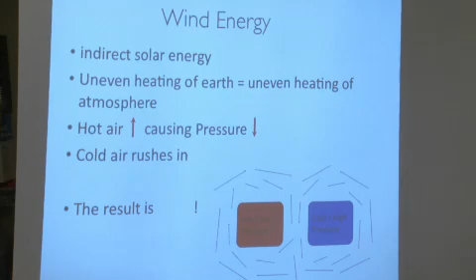So that's what's going on there. And then a lot of confusion sometimes happens. A lot of people see these turbines, or not turbines, but mills on farms, and it's confusing - what's this versus this? Is this just a junky version of this? The difference is, if it's a mill, it's extracting mechanical power, versus a turbine is extracting electrical power.

These mills are very high torque devices that move relatively slowly in terms of rotation, and are used to do things like pump water or grind grain. They've been around forever. They're still really common in the US and in many places for pumping water. If you drive across the country, you'll see these everywhere. They're still in use, and they're a whole lot cheaper to build than a turbine, because you're going from mechanical work to mechanical work.

So that's very direct and much, much cheaper than doing the extra steps to get from mechanical work to electric power generation. A wind turbine, in contrast, is electrical power. They have been around a long time too, but not for most of humanity. And again, they're going to be moving very quickly at much lower torque.

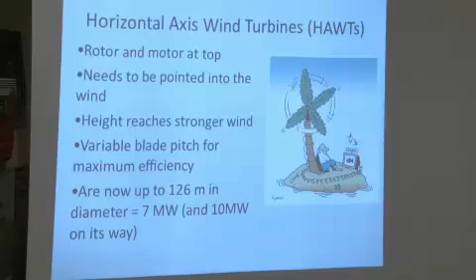So wind turbines I'm going to focus on, but I will go back to windmills a little bit at the end. You have two types, right - the horizontal and the vertical axis. The horizontal axis is what you're used to seeing around here, and what's in the news a lot, because they can go to much higher heights, and wind is much better the higher you go. The horizontal wind axis turbines are the more common thing, at least in my knowledge, before I started doing any research into them.

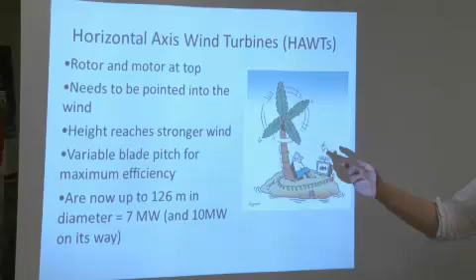So the rotor and the motor are at the top. It has to point into the wind. The higher you go, the better, but you can imagine the higher you go adds costs and difficulty. You often try to change your blade pitch to maximize efficiency, because depending on how fast the wind is, you want a different blade pitch. And they're now really insanely huge.

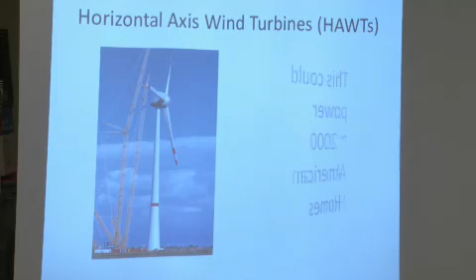So this is an insanely huge 7 megawatt turbine, which I think you can sort of see - is there a truck down there or anything? It's hard to get scale when it gets this big, but it's ridiculous.

Some of the challenges you can imagine in building this thing is just getting all the materials to the site, because you're probably not going to build your manufacturing plant, or your blade, right on the site where you're going to want to install your turbine. So then you have to get your blade there, and you're actually limited by the size of a train railroad car or a large truck or whatever. So there's all these crazy limits when you're getting up to be this enormous.

So it's kind of remarkable and challenging. And this is of a scale that we're not going to be touching, of course, but it's nice to sort of see the extreme of what is out there.

So this is a 7 megawatt turbine that's actually running now, I believe. And they're currently building a 10 megawatt that'll be in production, or running, in a year or two, which is a pretty big jump, 7 to 10. So yeah, it's definitely an area that's taking off.

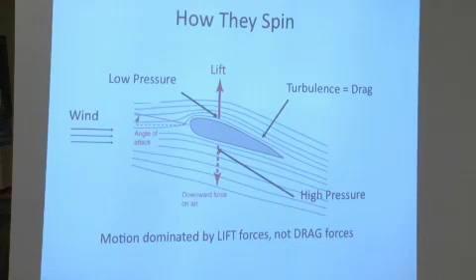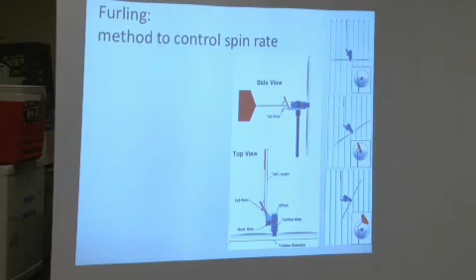One thing to think about is the need to control the spin rate. So you can imagine on days where there's not much wind, you might want to change the pitch of the blade to make sure you're maximizing the wind you're capturing. But on hurricane days, you have to make sure that your wind turbine doesn't completely just spin out of control. And so this is a really nice, relatively simple way to do it.

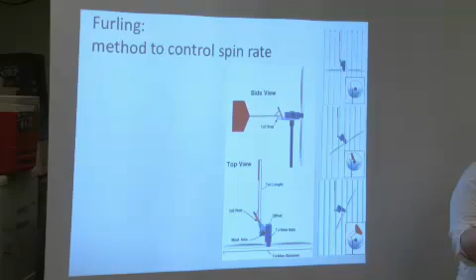So you can do it mechanically, electrically, or manually. Like old wind turbines from windmills from 100 or 200 years ago, there was some poor guy whose job it was to turn the turbine into the mill into the wind, or not, depending on how fast it was. Thankfully, there's been ways to optimize that either mechanically or electrically.

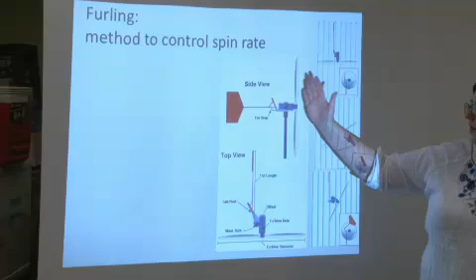So this is a method where basically the weight of the tail and the turbine allows the tail to stay connected to the turbine. The turbine generally has a tail that's exactly perpendicular - this plane and the plane of the tail are perpendicular, right?

So the tail makes sure it's always pointing into the wind, which is what you want, except when you're going too fast. Now you need the tail and the front of the turbine to not be perpendicular. If you're in gales, you need it to be completely rotated, so that the wind is just passing by the turbine. Or if you're in a moderate wind where it's too fast for the turbine but still usable, you want it to be off a little bit.

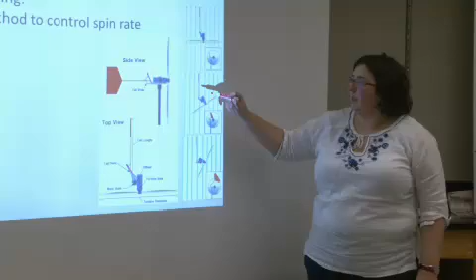The way this works is that when the wind speed gets high enough, you get some lift in either the tail or the turbine - I forget how it operates exactly - and that allows this tail stop to be disengaged. So then the turbine rotates a little bit, which you can sort of see from this top view. These are the front views, and this is the top view. So the turbine rotates a little, the weight balances out, the stop engages again, and it maintains this angle of orientation. If the wind speed gets even higher, the weights get out of balance again, things lift, and the stop disengages. So it's a really cool system to keep your device safe, and there's a lot of them out there.

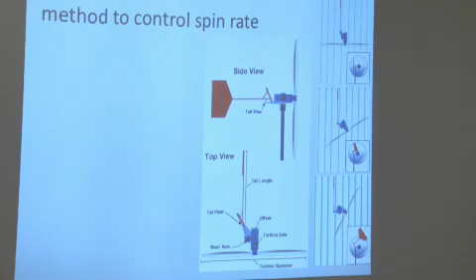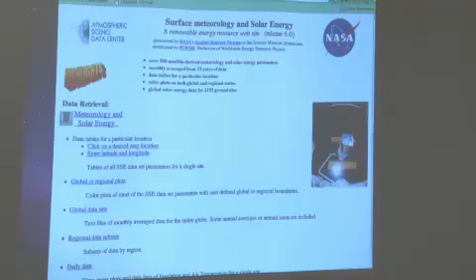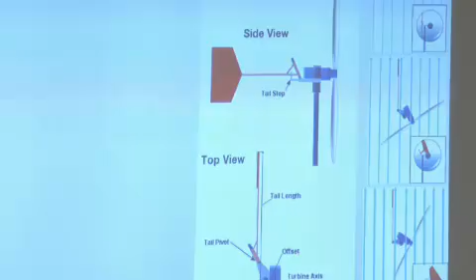So the typical components of a wind turbine: you have your rotor, you have your blades, you have a brake, because you want the turbine turning at a certain speed ideally, so you may need to provide braking before you're providing rotation out of the wind. That's another smaller step you can take. You have a gearbox to get the speed right to power your generator.

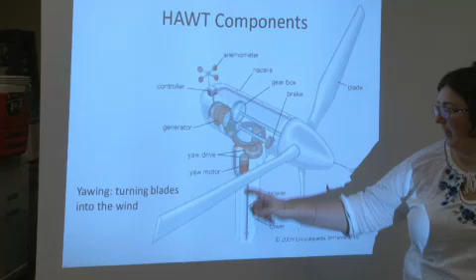Typically on a fancier wind turbine there's an anemometer that provides the electrical control with yaw drives and motors to rotate the turbine into or out of the wind to maximize its speed, and then your tower. All the electricity is generated in this part, and the power goes down the tower.

You can imagine the challenge of maintenance when you're dealing with something really high up. So the smaller turbines we'll be looking at are all on guy wires and a pivot so you can rotate them down and don't have to climb up to do maintenance, because that requires a much sturdier tower and is a much more dangerous job.

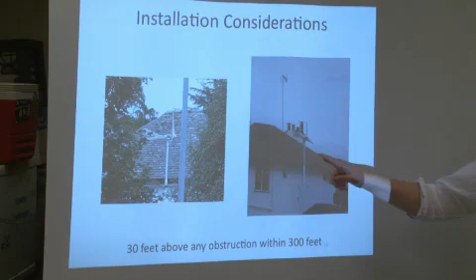Some installation considerations that one would think would be obvious but aren't always. This is a wind turbine installed basically on a rooftop by some trees, so it's got two types of objects blocking the wind entirely. This was a many-thousand-dollar installation that's probably providing zero electricity, because the wind may be sufficient 30 feet up, but right there is never going to be sufficient.

30 meters, 30 feet - a good rule of thumb is you want your turbine to be 30 feet above any obstruction within 300 feet. Obstructions include things like houses and plants and anything else that might be in the way.

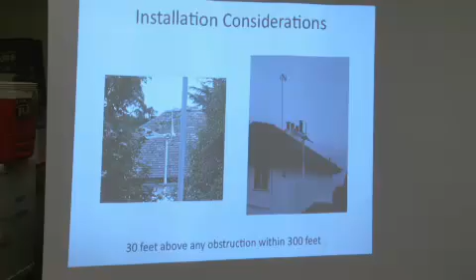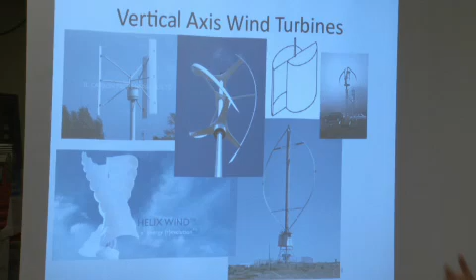And so these power traffic lights in Taiwan. There are places where these are installed effectively, and they're kind of cool, because as you can see here, you can almost build them out of anything, and you will build them out of anything on Friday.

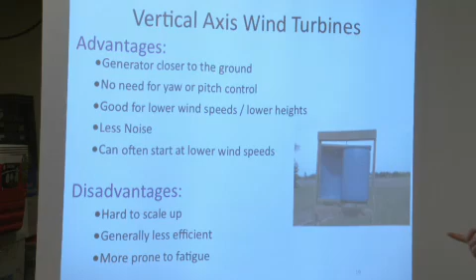Some of the disadvantages: they're hard to scale up, so you're never going to get a 7 megawatt vertical axis wind turbine. That's just not viable. They're generally less efficient and more prone to fatigue, wearing out more easily because they're capturing so much more of the wind. But for our purposes, they're definitely a possibility to look at.

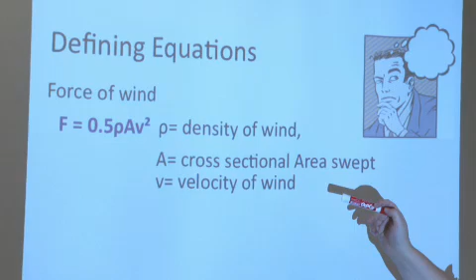Just a reminder of the equations we're thinking about. The force you're receiving is equivalent to 1/2 times rho times A times v squared, where v is the velocity of the wind, A is the cross-sectional area swept, and rho is the density of the wind.

The maximum possible power extraction is dominated by the velocity cubed. So your wind velocity is really what you worry about when designing. Area is important, but velocity is cubed, so the wind speed is huge.

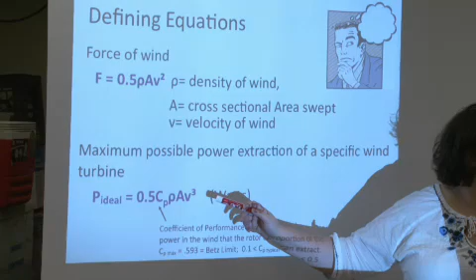Whenever you're thinking, is this a place where a wind turbine is appropriate, the first question is: what's the wind speed? And then there's a coefficient of performance.

This reflects the reality that wind turbines are not perfect. There's a hypothetical limit - if you Google the Betz limit you can find the proof, which is kind of cool - of almost 0.6 as your hypothetical maximum efficiency. A typical limit in reality ranges from 1/2 for a really sweet horizontal axis wind turbine to less than 1/10 for a vertical axis wind turbine, which is really old school but does the job when you need it.

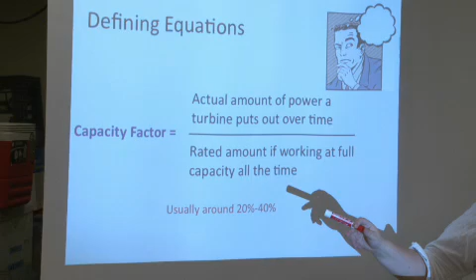The other equation to think about is the capacity factor. I've seen some websites say wind is so much better than solar because wind is 24/7. Well, not really - unless you're getting way up into the atmosphere, and even then there's a lot of variation. Wind is not 24/7; there's a tremendous amount of variation. Generally it's 20 to 40% of the time that your turbine is generating power, which is starting to sound more like solar, actually. That's definitely something to keep in mind.

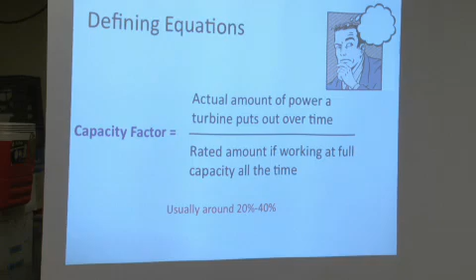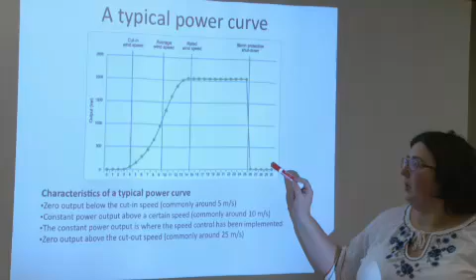Here's a typical power curve. At some given speed is when the turbine starts actually turning, because up until then it can't physically turn since the wind forces aren't high enough, and your power output is very low. Then you have an average wind speed somewhere around here, giving you about half the wind power you'd like. Then you have a maximum wind speed where you're happy, happy, happy, until at some point it gets so high you have to shut the turbine down or else you're in trouble. That's a good general way to think about what happens over different speeds - I'll show you data later with the different speeds.

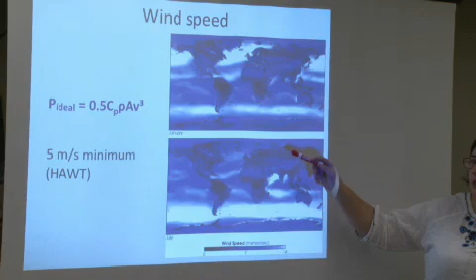You can see how much variation there is between January and July, so of course there's a lot of seasonal variation no matter what. This blue is 7 meters per second, which is getting to be useful. For a horizontal axis wind turbine you need 5 meters per second; for vertical you can go a little bit lower, but 5 is a good rule of thumb.

Again, why we're looking at velocity over everything else is because velocity is cubed in your power equation. So, great, I've told you wind speeds. I've showed you a NASA map of the entire Earth, but that doesn't tell you much for a given location.

So one way to get a really rough estimate of wind speed is this Beaufort scale, which was developed in the 1800s. It correlates what you can visually see and what kind of damage you're seeing to the speed. Some of the caveats are, number one, it's pretty rough. Especially if you're talking to people in a community and giving them examples, it's hard to remember exactly what the wind is like. Can you tell me what the Beaufort scale was today walking here?

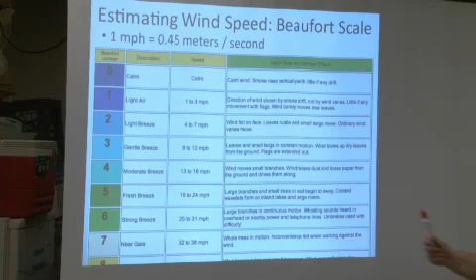I can't. I don't remember. I don't really pay attention to the wind that much. If you're working with farmers, they're probably a little bit more aware of it than you and I might be, but still, it's challenging. The other thing is that a lot of these metrics are on the ground, and we're probably talking about significantly higher than the ground, depending on what kind of turbine you're implementing.

And so, again, that only helps you so much. So if you're finding out that you're probably at 4 miles an hour, which is 2 meters per second and really low, but at the very ground level, and you're building a turbine that's 10 meters up, maybe 30 feet up, maybe you have a shot of getting enough wind.

Is there like a uniform scale from what the wind speed is at ground level to how it changes vertically, or is that a regional thing? Well, so it's both.

Yes, there are some scales that can help you estimate if you know what the ground is, what it is up above, but it's also really dependent on what's around. I'm about to show you a tool that helps a little bit with that, but it's still very imperfect. Ideally, you'd have an anemometer and leave it up for 5 years, with 10 different anemometers at 10 different heights, and that would get you actual real data you'd be psyched for. But that would be a really ridiculously slow, expensive project. So a lot of this is just estimations and doing your best guesses.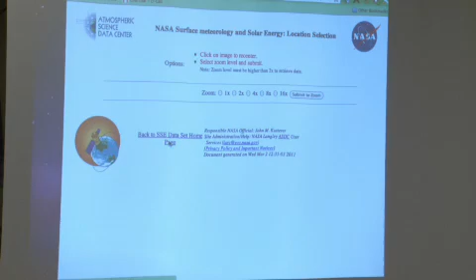And then it's slow, but it looks so clunky that I was afraid you'd be turned off by it, and it has good enough data that I wanted to go through showing you it. So you have this map of the Earth. You click in the part of the Earth that you care about to center it, then you click to zoom.

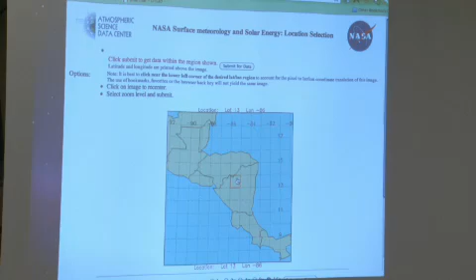We're in the wrong part of the world, but we're getting there. I'm gonna zoom in again. All right, and you can see this is data for a region, not for a small town. So there's all sorts of limits to this data, but it's useful.

And so now you can finally get your data, and now you can get crazy information. So parameters for solar cooking, for solar panels, cloud information, which can be really useful, temperature, which can be really useful, and now we're getting to wind. So you can see the variety.

So you can get 50 meter and 10 meter data, but because this is all satellite data or airport data, 50 meters is pretty high for anything we're talking about, and then 10 meters is for terrain similar to the airport, because they're measuring at the airport since that's the place where they have anemometers. So all of this data, again, you have to take with a grain of salt, but if you use it in conjunction with your own visual observations and talking to people, it's better than nothing, which is the alternative, or a $1 million 10-year study, which isn't viable either.

So we're going to just look at wind speed at 50 meters for that area of Nicaragua I just selected.

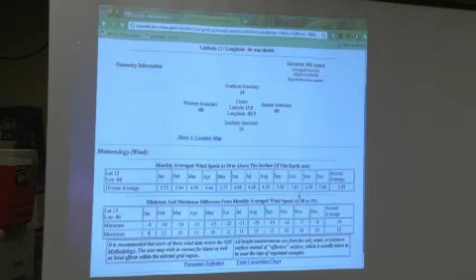You can see a 10-year average and a minimum and maximum variation, so it's pretty helpful just to get you into the ballpark of whether you have a shot of this working. Some of the other things you can select for are how high you are, getting to an estimate of where you are and what your ground cover is, and then it extrapolates what the wind will be. Is it 100% accurate given that it's doing broad-based readings? Of course not, but it's a start. It's a nice resource to know about.

Now I want to spend time talking about examples of wind power in developing countries. One is the Humdinger wind belt, totally different from what you're used to seeing, developed by a student who took one of the first D-Lab classes when it was the Haiti class. We have a wind belt here but I couldn't find it, so maybe during break I'll dig it up, or we can show it in lab on Friday. The way the wind belt works is that instead of rotation, it just uses the vibration of the belt.

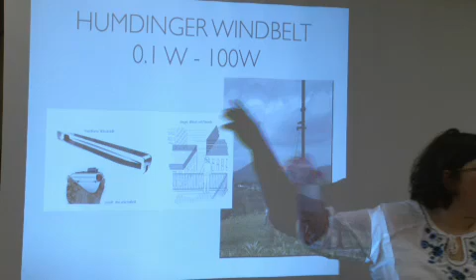Very similar to, I don't know if you guys can remember the name of the bridge that collapsed.

Does everyone know the Tacoma Narrows Bridge? Google it, you can see videos and it's awesome if you haven't. It's totally scary, especially because I have a friend who did some research into it. This bridge, a super long bridge, had natural frequencies at the same rate as the wind was often blowing, so the bridge would just go up and down crazily, and eventually one day it got so bad that it completely broke apart. The crazy thing is people used to hang out on the bridge on really windy days because it was so fun, like a roller coaster. So it's extra scary thinking about that.

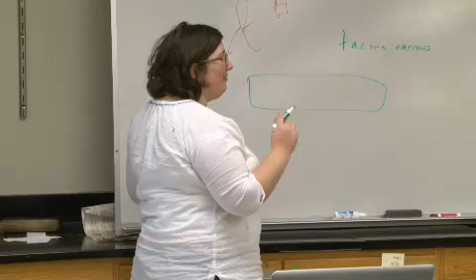But this was the inspiration for the Humdinger, which has a really tightly pulled belt in the middle of a support structure. The wind goes perpendicular to the board, which hits the natural frequencies of the belt and causes it to vibrate. Then you just have some magnets next to a coil on the corner that allow you to generate electricity.

For certain applications, this can be a really low-cost way to provide electricity. This is a relatively fancy way of building it, but you can imagine, and they have, building it out of something like a PVC pipe, which you can get anywhere, and building it really simply. Because there are very few moving parts and nothing rotating, it's much easier to build than even a vertical axis wind turbine.

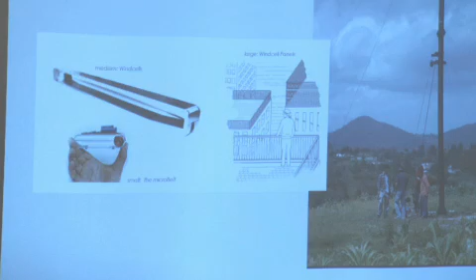It's a really neat application, and hypothetically you could imagine building it into structures like railings on buildings and stuff in order to power different things. So this is one example, and we do have at least a couple at D-Lab, so we'll make sure to show them to you later today or tomorrow.

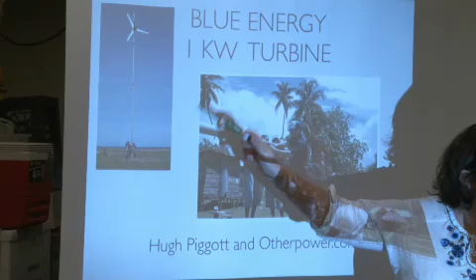Another example is the classic wind turbine in developing countries designed by Hugh Piggott. These are pictures of work being done at Blue Energy, in Bluefields, Nicaragua, which we worked with last year. They build all these turbines. You can see the support wires, and that you can rotate the turbine down so you can do maintenance on it, which is a really nice feature. That's one classic design that's pretty common in developing countries.

And then a lot of people have heard of William Kamkwamba. Oh, there's the wind belt, so let me go back to that.

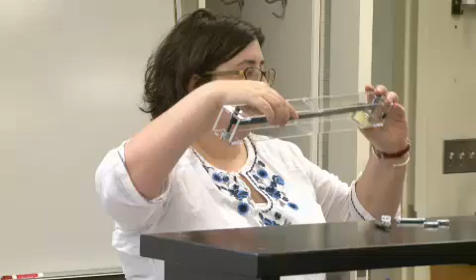So I'll pass this around, and the belt is not exactly taut at the moment, but you can see the belt, the magnet on the belt that goes against the coil, and that's really all there is to it. Then a little bit of circuitry in order to generate power, which is a really simple way to do things.

So what's the idea? The wind goes through the tape there, and the tape vibrates because it hits natural frequencies, and the vibration allows you to generate electricity. It's movement, that's all you need.

So William Kamkwamba was this guy. Where did he live? In Malawi. He just got really interested in how he could get electricity at his house, went to the library, read a bunch of books, got inspired, and built his own wind turbine, which doesn't look like your traditional wind turbine.

There are a few design improvements that could be made, especially with better resources, but it worked well enough for him to power a radio at his house and charge cell phones, which got people really excited, so then they would start paying him so he could start building more and more turbines.

So it's a really cool story, and now he's at Dartmouth in school, which he never could have done had he not built this turbine. So he's a cool guy.

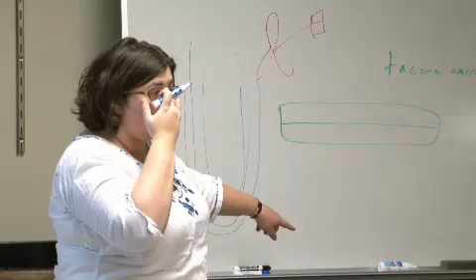So there's a rope pump here, and the way a rope pump works is incredibly simple. You just have a rope inside a tube that goes down into the water table, so that you're getting water through holes in the tube. Then you either have knots in the rope, or if you can find them, rubber washers, like every foot along the tube. This is obviously not to scale in any way. So the water gets trapped between the washers, and you pull up the water that way.

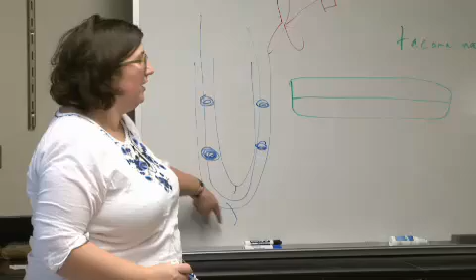So this is really simple. Again, we're talking about ridiculously low efficiencies, but if you need to irrigate, this is a way to do it that just uses the wind, that works really well. This was built for $40, which is ridiculously inexpensive compared to even like a Hugh Piggott wind turbine, which is in the thousands of dollars. So there are opportunities for a whole range of possibilities.

And then there's just so many different types out there. So if you look into it, wind is one of the areas where people get really excited and like to build their own stuff, and you can see a huge variety of designs in the world. So that's wind in a very fast nutshell. Are there any questions about that?

Okay, so next is microhydro. Microhydro is kind of funny because it's harder to find really good examples of installations in the developing world, because they tend to be just built but not well documented, is what I'm finding. So I'm going to talk more about how you would determine if a microhydro installation would be appropriate, and I don't have as many good examples of installations that are successful, but they're certainly out there.

So hydropower is just using the gravitational flow of water to generate power, considering both the two terms I'm going to use: head and flow rate. So head is the distance that the water falls, and flow rate is how quickly the water is moving.

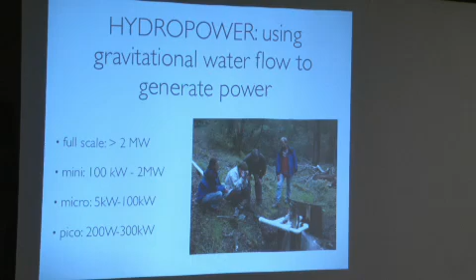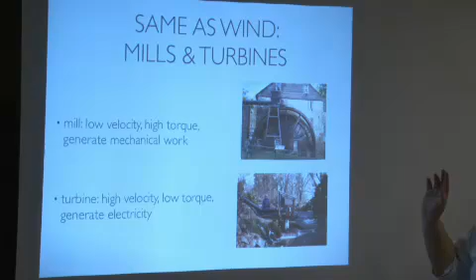With water power, it's the same as wind in terms of there being mills and turbines. You can think of the old grist mills and other things you can still see in parts of New England. They're low velocity, high torque, delivering mechanical power directly, as opposed to a turbine, which is much higher velocity, much lower torque, to allow you to generate electricity. So those are the two extremes.

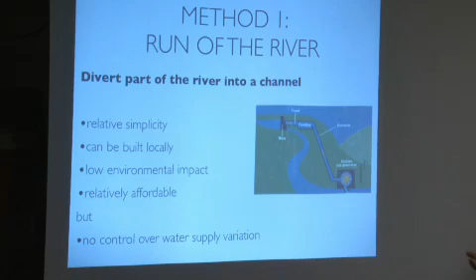In terms of hydropower, there are two methods. One is called run of the river, meaning you're just taking a chunk of the river and siphoning it off into a tube that goes directly into your turbine. The other option is a dam. The benefits of run of the river are that it's relatively simple, you can build it locally, compared to a dam which is much harder to build generally. It's comparatively much lower environmental impact than a dam, and relatively affordable. But when you have a drought, you don't have any storage like you have with a dam, so that's the drawback.

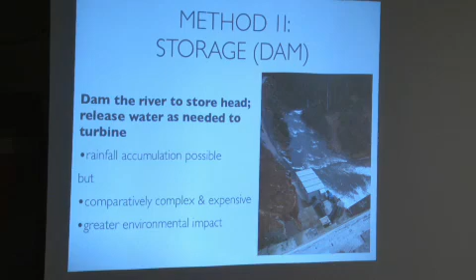The dam is the reverse: you can accumulate your rainfall, which is great, but it's relatively expensive, and there's a greater environmental impact on the negative, because damming up water affects the local environment, from the fish to just what the fields look like, et cetera. I'm sure you've heard of dams in China or similar that have destroyed entire communities for building dams on a very, very large scale. There's also more maintenance associated with the dam too, in terms of silt accumulation.

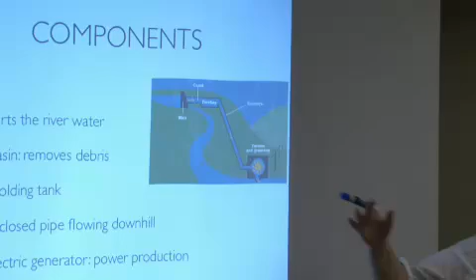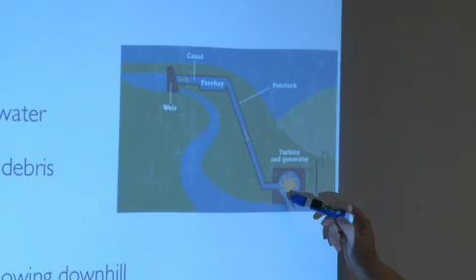It's challenging, so we're just going to talk about the run-of-the-river model. The components you have are something called a weir that diverts a chunk of the water into your tube. You generally have a settling basin so that any debris settles out, because you don't want it going into your turbine, or you'll destroy your turbine. A forebay, which is a small holding tank, gives you reserve capacity, but that's talking about variation on the order of seconds or minutes, not days or months. Then there's the penstock, a closed pipe flowing downhill that feeds directly into your turbine, which generates your electricity, and then the water is returned back to the river.

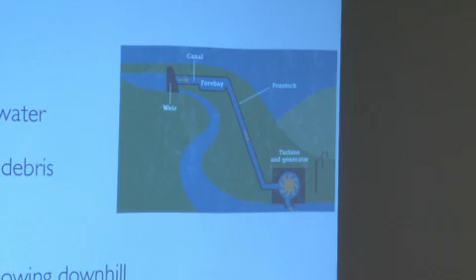There are a lot of different turbine types. One of the most efficient, if not the most efficient, is called a Pelton wheel. You can see it's got a relatively complex geometry, so it's relatively expensive and challenging to build, but if you do, it's very efficient. It works well for a high head, low flow situation. Head is how far the water is dropping.

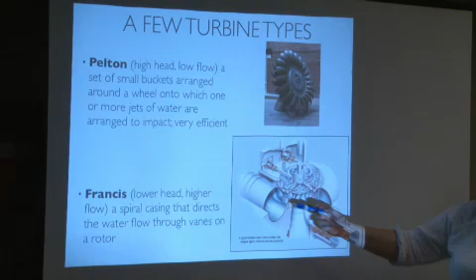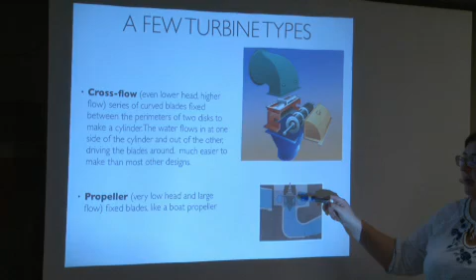Francis wheels work better for lower head, higher flow, with a spiral casing where the water comes in, spins the turbine, and then comes out. Cross flow turbines have the water flow over a cylinder with a bunch of blades on it, which spins the shaft to generate electricity. And a propeller turbine literally uses a ship's propeller, but instead of being powered to move the boat, it's used in the exact opposite way.

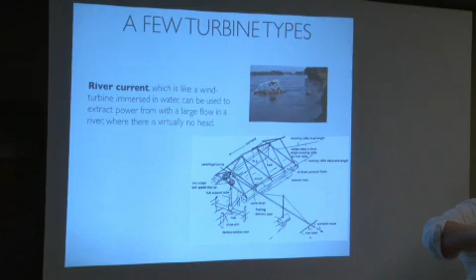You need different types of turbines for different flow and head situations. One example is just literally putting something in the river, skipping all the extra stuff of filtering and siphoning off the water, just putting something on top of the water. This seems really simple and great until you think about all the challenges in terms of flooding and debris in the water, et cetera. This is a device that is really prone to failure, but it works in areas where that's your only option, or it can work.

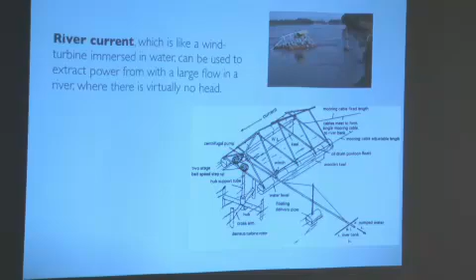So some of the considerations you need for microhydro: one is that the minimum head and flow you need is 3 feet of head and 20 gallons per minute of flow.

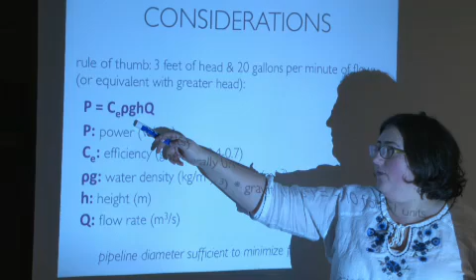So that would be the minimum head you need. And if you have more head, either bonus, you get more power, or you can therefore have reduced flow, because the power equation here is, again, a coefficient of efficiency times the water density and gravity times the height, which is your head, and Q, which is your flow rate. So you can see that HQ you can keep constant. If you increase your head, you can lower your velocity and keep your power constant.

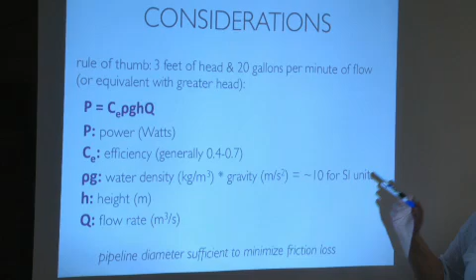One nice rule of thumb is if you stick with SI units, rho G is about 10. So you can just plug that in rather than having to remember the density of water and gravity, though in SI units that's relatively easy. But 10 is a nice way to just remember it. And efficiency is somewhere generally between 40 and 70%.

One other thing to think about is your penstock, so that's the water going through the pipe to get from the top of the river down to your generator. If your pipe diameter is too small, you're going to have frictional losses in the pipe that dominate and slow your water down so much that it's problematic. So that's another thing to remember, because it's tempting to use small diameter pipe for a variety of reasons, but that's dangerous.

So how do you figure out if a river is appropriate for using microhydro? The two things you need to know, again, are flow and head.

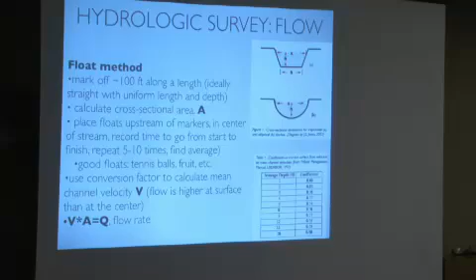The simplest method I can find for measuring flow is called a float method. And you can imagine actually doing this in a river would be challenging, so it's not trivial, but it is possible. You mark about 100 feet along a length that's ideally straight with uniform width and depth, which is comical to find in a river, right? I've never found a river that has 100 feet of uniform width and depth, but you do your best. Then you calculate your cross-sectional area A. People usually model it as a semicircle or a trapezoid or even just a rectangle.

Calculate that cross-sectional area. You place a marker at the start and end of your 100 feet, and then you put floats in the river at the center of the stream and time them to find out how long it takes for them to get from one end to the other. If you want to get complicated, you can put them at a bunch of different points at different levels to worry about friction losses, but you don't actually have to do that to get a ballpark measurement. You can just do it in the center. And good floats could be a tennis ball, an apple, or whatever you can find that floats.

And then you do have to use a conversion factor, because your water's flowing faster at the top of the river than in the center, because of the friction associated with the base of the river. So you use a coefficient just to correct, and then you get your flow rate. Yay!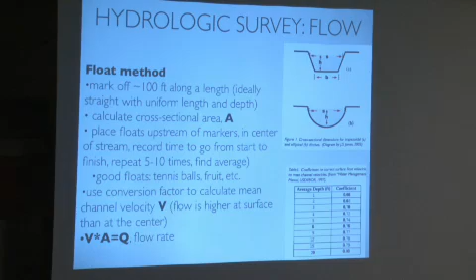So that was a lot of work, and all you have is a flow rate for one day. And water flow rate varies tremendously during the season. So again, you can do your 10-year study, or you can just get some data on annual precipitation and when the rainy season and dry season are, and do your best to estimate. But yeah, so that's how you'd get your flow rate.

And then in terms of head, the simplest method that I found is you take a yardstick or a stick of known length, it doesn't need to be a yardstick, and you put on it a clear tube that has the ends capped, that's half full of water, and that's a really cheap level, basically. Or you can get a real level if you have one. But if you don't have a real level, you can just use a cheap level.

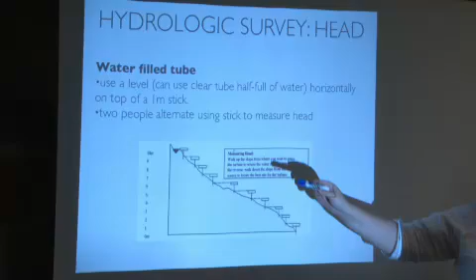And then, hopefully with two people, you put the stick at the bottom or the top and then just keep moving it over and over again until you measure your head, which is a pain, but people do it and it works. And actual surveying equipment is really expensive, so you're unlikely to have that in the field.

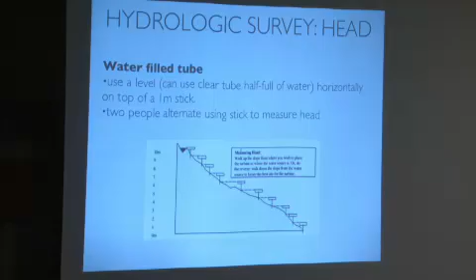So if a community partner asks about this, you have a method to measure that's plausible. Sorry, I thought the head was the drop of water. So you're putting this in the river, perpendicular to the water going through this one?

So for the flow measurement, you're putting your floats in the water and watching how long it takes to get from one end to the other. And that'll give you a measure of flow.

And then your river ideally is—let me get a picture instead of trying to draw a bad picture. So your river is hypothetically going down the mountain here and sort of doing a curve. And so you're saying, okay, well, I'm going to put my weir and everything up here, and I'm going to put my location where I'm going to actually generate the power down here.

So I need to calculate the height from right here to get my head height. So now I need to very painfully go up the mountain in order to figure out exactly how high this distance is. Does that clear it up? Okay.

Okay. So that wraps up microhydro. Are there any questions in addition?

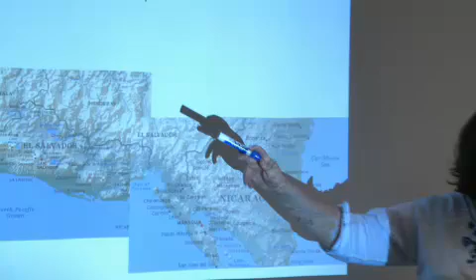So one group of students is going to be going to El Salvador, and then 2 teams will be going to Nicaragua. El Salvador doesn't border Nicaragua, but it's pretty close. So we're not that spread out yet—we're not approaching D-Lab development quite yet.

So the teams are as follows. AsoFenix will be going to—Bus, Rosser, and Brianna will be working with AsoFenix, and Carter, you'll be working with them for the start of the term.

I don't know if I've mentioned this: the teams you go with and the projects you work on for the spring break trip may or may not be what you end up working on afterwards. So what happens is the week after you get back from spring break, we sort of figure out what projects are going to happen.

You tell me what you prefer to work on. Some students are really psyched to stay on the project they went on for spring break, and naturally I'm going to try to make it possible for you to stay on the project you're really psyched about, especially if you're knowledgeable about it because you just went on a spring break trip—great.

But if for whatever reason you're like, you know what, I can't stand AsoFenix, I don't want to work with them or any of their projects ever again, I'm not going to force you—hopefully not going to have to force you to stay on that.

So there may be a little shuffling, especially for the people who aren't traveling—there's variation. And I'm pretty sure Eric has dropped the class, but if he hasn't, he would be on this group.

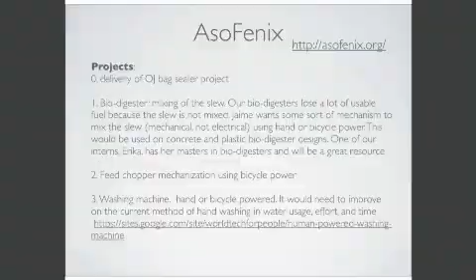So the projects you're going to be working on: one is, last year the students worked on the OJ bag sealer. So one thing is delivering that bag sealer, which ideally means reading the final report from last year and learning how it works so you can show it to AsoFenix staff when you get there. That's sort of the service-y project as opposed to the investigative parts of the work.

And then the 1, 2, and 3 are the projects that you're going to be investigating.

So one is the biodigester. They have biodigesters and they want to be able to mix internally so that the sludge provides better digestion. They're looking at either hand or bicycle power, and they have both concrete and plastic biodigesters. The second is a feed chopper mechanism using bicycle power, and I can show you video of the feed chopper.

And third is a washing machine. D-Lab has actually done a lot of work on washing machines, so this is one area where you can learn about the existing washing machine designs and potentially bring them down, and even build one while you're there is a possibility.

At the end of going through all this, I'm going to talk about what you need to do with this information in the next few weeks, and then you'll have time to work with your teams, talk to me a little bit. Your mentor will show up at 2 to work with you on all of this.

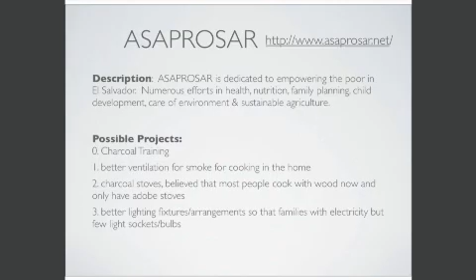So what do you have to do with all this? Right now, and by right now I mean in the next 2 hours, talk to me and do some brainstorming of ideas. Your deliverable for this step is 2 annotated pictures from each team member.

There are a lot of different deadlines for all these different things. I'm just trying to help you get through the next couple of weeks in a way that you actually get output and don't save it all to the last night, which will lead to weak packing and weak help for your community partner. So this is hopefully all in preparation so you can maximize the value to you and your community partner for the spring break trip. For people who aren't traveling, you're helping make sure they're maximizing their work, and it's also getting you prepared for doing the project work after spring break. So I don't think this is busy work for you in any way.

So that's one, doing a brainstorming effort, and I'm going to talk a little bit about brainstorming in a minute so you have some guidelines there.

Pictures, do you mean find examples of existing technology or do sketches? Just sketches. So when you do a brainstorm, like if I was brainstorming wind turbines, I might do a picture that looks like that - takes me 10 seconds to draw. That would be really appropriate in a brainstorming session. For the pictures you turn in, I'd want it a little more refined, everything drawn a bit more carefully, with a few more elements that make this a real device rather than just something disembodied in air.

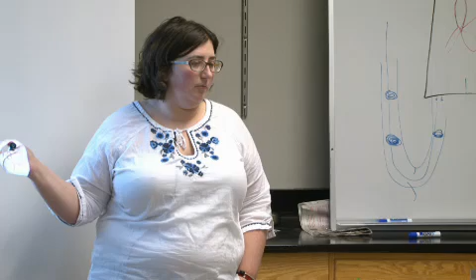Come up with the best guess so that when you talk to your community partner, who often don't have a lot of comfort with numbers and may give you really wacky numbers, if they're giving numbers completely different from what you're expecting, that's a good indicator you need to keep asking questions - either you learn your assumptions were totally off, which is important to learn, or your community partner isn't really understanding the question or doesn't have the educational background to give a useful number, and you have to work in a few different ways to actually get to that number. We'll talk about that during trip prep week, about how you actually do that process of getting that information.

The next aspect is doing a second brainstorm, and it's up to you as a team if you want to do this in two stages. Sometimes people like to brainstorm on their own for a bit and then come together and bring those ideas to a group brainstorm, building on them further. Some people prefer just to do a group brainstorming session, so it's up to you, but the second brainstorm should at least have a group component.

And for those, it's just 2 annotated pictures for each project. And so it's fewer pictures because it's not per team member. So you guys can just figure out how you want to split those up.

Another thing is the big questions you want to make sure you get answered, so keep those in mind, to make sure by the end of the trip you've gotten answers. All of these questions relate to figuring out: can you actually work on this project? Is this a good project? And if you are going to work on it, what is the appropriate deliverable? That's the type of questions.

A materials list for the trip. You may well need some materials if you're going to do a charcoal demonstration, if you're going to try to build a washing machine, or if you have a great idea for a project and want to implement a prototype in the field. Your community partner needs to know so they can provide the materials, or we need to get them here so we can bring them down.

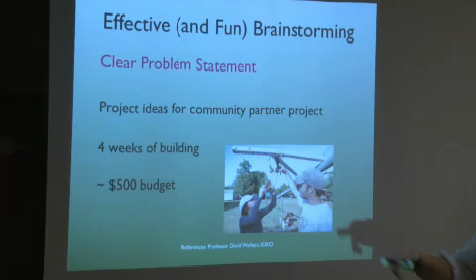It's nice to have in your mind a general sense of these sorts of things, so that you're not only brainstorming things that are in the like 7 megawatt wind turbine category, if you're thinking about wind power. So for fun and effective brainstorming, you're trying to generate as many ideas as you can in 15 minutes.

So 15 minutes is a good length of time. Sometimes you need a little more, a little less, but around that time for any particular project statement. And then you can say take a break, take a stretch, and then come back and work on the next problem statement. You want your sketch to really be a picture with a few words.

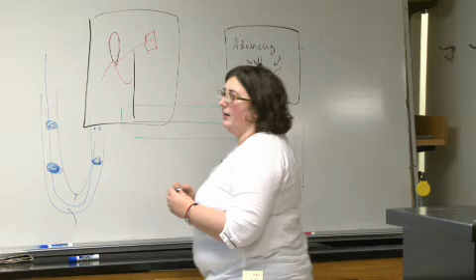So a lot of people, if they're brainstorming weapons of war, and you have your 8.5 piece of paper, might draw this. And I would say that this picture is a lot more evocative of what your idea is than using the words 'big' and just a tiny drawing. And those of us who are not so good at drawing, and I'm one of them, are tempted to draw really small because you don't want to show in really big format just how bad your drawing is. But even being a weak drawer, you can still get your idea across pretty well.

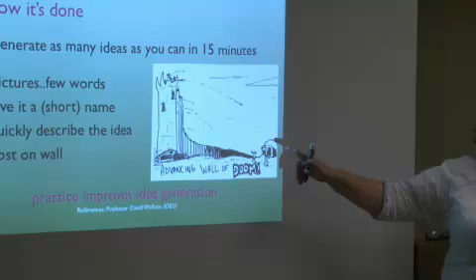This is like a 3-minute sketch for an artist. So none of your brainstorm ideas are going to look this crafted. This might be the actual annotated sketch that you turn in, that you actually refine and spend some time on.

So the 10-second version is going to be a guy, and you have a guy, and he's shooting stuff, and here's the person who's unhappy, getting shot at, and then here's the wheel that's moving your wall of doom, right? So this is a really fast version of that sketch, and that's what I'm looking for, not that. But I just wanted to emphasize, most people start out doing this, and you really want to force yourself to do that with maybe the description at the top or the bottom, but the picture should dominate, not the words.

Yeah. So I'm still a little confused as to how the 3 projects that you listed on each slide relate to the brainstorming and the sketches.

Okay, yeah, so the 3 projects. So if one of your projects was the feed chopper, right now you know nothing about that project, right? So you may not be able to brainstorm that at all until you come talk to me, which is part of what you need to do in the next hour and a half. Is come talk to me so I can give each team a little bit more detail about their 3 projects.

But one of them might be something you can brainstorm on initially if there's a queue to wait for me. But either way, once you know a little bit about the feed chopper, then that'll be one of your brainstorming assignments. The project, the community partner needs this mechanization of the feed chopper, and let's brainstorm ways to mechanize that feed chopper, and just put out as many ideas as you can in 15 minutes.

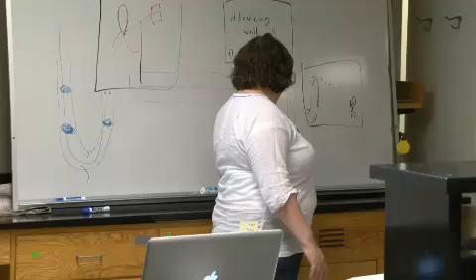And so once you draw this beautiful picture with your group, what you do is everyone's hopefully drawing, and you just say, hey guys, my idea is an advancing wall of doom. And then you grab a piece of tape, and we're going to use the 3 fume hoods as our boards. So each group will be around a fume hood. And so just tape your idea up on the wall, and then get back on drawing.

So what are the rules of the game? One is deferred judgment.

So when I propose that I want to make a wind turbine that's just going to float in the air magically with helium balloons, and you see a few flaws in that idea, you just have to bite your tongue. One way you can manage that is by saying, okay, I'm going to build on your idea, and instead of helium balloons, we're going to use a post that's attached to the ground.